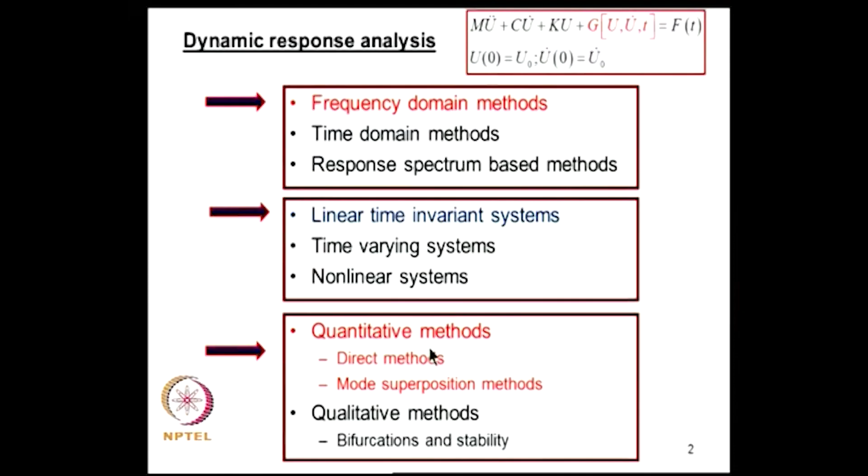Now, in our discussion on damping models, we saw that there are two alternative strategies to model damping. One is within the framework of linear system modeling: one is viscous damping, the other is structural damping. The classification into viscous and structural depends upon the behavior of energy dissipated per cycle as a function of frequency.

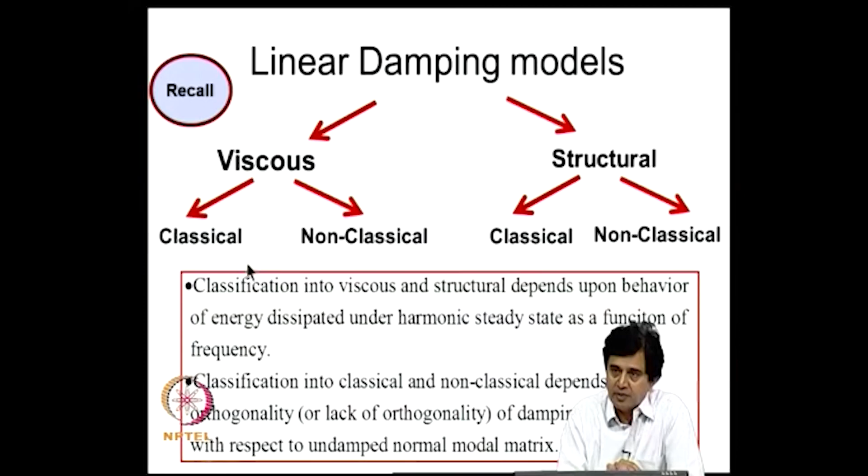We also classify the damping models as being classical or non-classical, and that classification is related to the issue of whether undamped normal modes are orthogonal to the damping matrix or not. So if the damping matrix is orthogonal to the undamped normal modes, then we say that the damping model is classical, otherwise it is non-classical. So we also saw that the input-output relation for linear time invariant systems,

in time domain is through a convolution integral, in frequency domain it is through a frequency response function, and the impulse response h of t is the response of the system to a unit impulse, and h of omega is the amplitude of the response to an external harmonic excitation.

So we were discussing the questions about damped forced response analysis. We considered an equation of this form with given initial conditions, and we started with the undamped normal modes, where phi is the modal matrix, and we made the transformation phi into z of t. Z of t is a new coordinate system.

Upon substituting that into the governing equation, I get this equation, and pre-multiplying this equation by phi transpose, I get this equation. Here phi transpose m phi is the new mass matrix in the new coordinate system z of t, and that is an identity matrix. That is how we have normalized the normal modes, and phi transpose c phi remains as it is. This is what we need to discuss now, and phi transpose k phi is a diagonal matrix with the eigenvalues on the diagonal. F bar of t is the generalized force, which is phi transpose f of t.

Now the question is, what happens to this phi transpose c phi? If phi transpose c phi is a non-diagonal matrix, then the equation of motion would still remain coupled, and all our exercise in finding phi and making this transformation will not be fruitful.

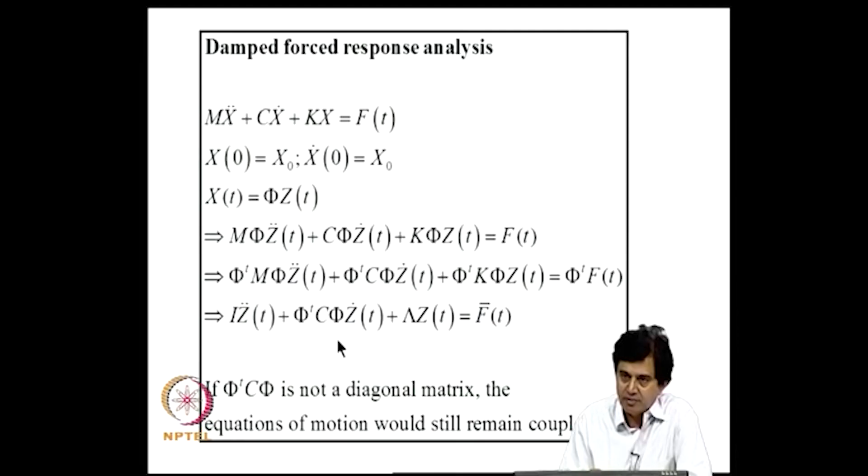So what we do in classical damping models is restrict the class of damping models, that is the damping matrix C, to only those matrices where phi transpose c phi is a diagonal matrix. Such damping matrices are called classical damping matrices, and in such cases the undamped normal modes, that is phi transpose c phi, will be a diagonal matrix. That means the undamped normal mode diagonalizes the C matrix also.

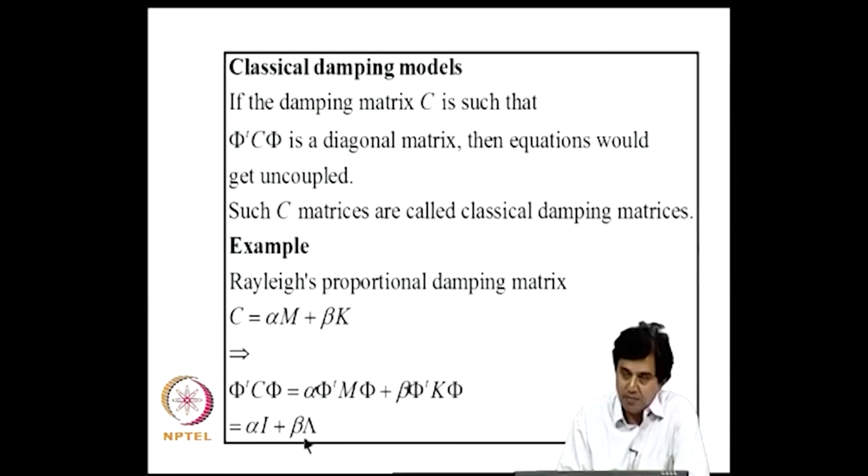So an example for this we saw is the so-called Rayleigh's proportional damping matrix, alpha m plus beta k. If I now find phi transpose c phi, I will get alpha into phi transpose m phi, plus beta into phi transpose k phi, and this is alpha I plus beta into capital lambda. Now, using this,

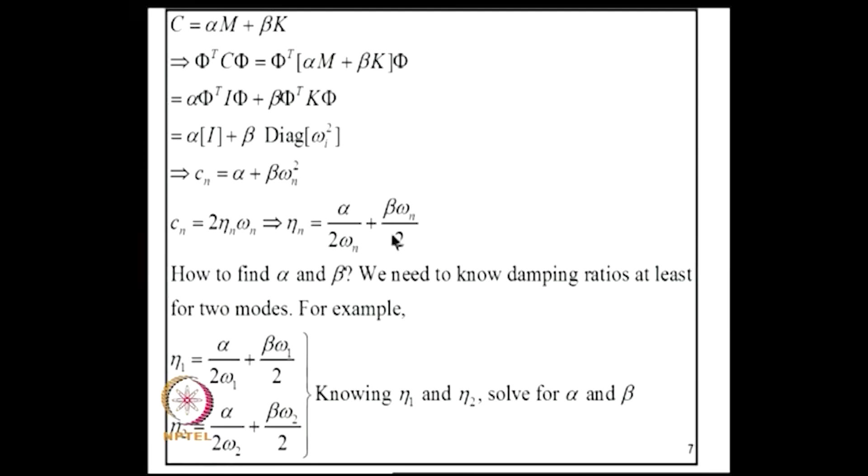we showed that the damping ratio as a function of frequency has typically this type of behavior. It has two open parameters, and we determine the two open parameters. We write the equations for, say for example, mode 1 and mode 2 where we know the damping, and we solve for alpha and beta. The moment I find alpha and beta, damping for all other modes is evaluated from this equation.

Now let us examine in some detail the model C equal to alpha m plus beta k. The success of this model in making phi transpose C phi diagonal depends on two orthogonality relations: phi transpose m phi is diagonal, and phi transpose k phi is diagonal. There are two model parameters here, alpha and beta. The fact that it has two model parameters is very much related to the fact that there are two orthogonality relations that we are using. That is, the model alpha m plus beta k admitting two parameters is related to the fact that we have two orthogonality relations.

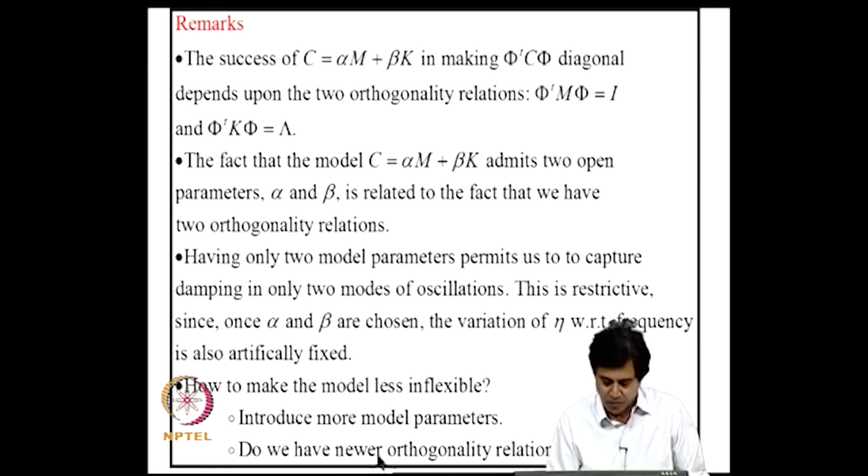So questions we could ask at this stage: how do we make the model less inflexible, or more flexible? The idea is to introduce more model parameters. If I introduce more parameters, instead of alpha beta I have say alpha 1, alpha 2, up to alpha n, and beta 1, beta 2, up to beta n - how do I select them, and how do I ensure that my choice of alpha and beta ensures that phi transpose C phi is still diagonal? This leads us to the question: do we have newer orthogonality relations, or are the two we're talking about the only two? Now it transpires that there are actually two infinite families of orthogonality relations.

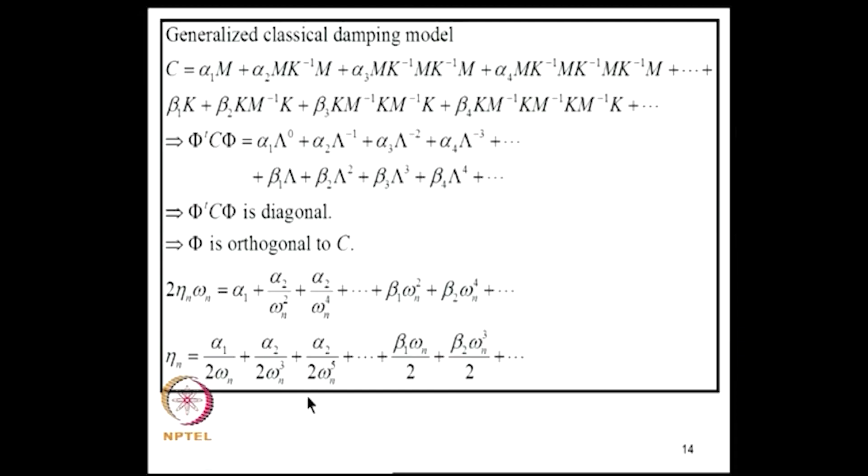This would mean now that I can develop a generalized classical damping model beyond alpha m plus beta k, by using the additional orthogonality relation that we have developed. So I can write C as a linear superposition of various combinations of k and m matrices as shown here.

If we use this expansion, we can show that phi transpose C phi remains diagonal and it has this form. Now that means phi is orthogonal to C if C is of this form.

Now I have as many model parameters as I deem desirable. So if I now use the orthogonality relations and write the diagonal entry in the nth row as 2 eta n omega n, I can write the right hand side in this form. So this is the way eta n varies with omega n.

Earlier we had only this term and this term, now we have more newly introduced terms which will lend flexibility to my modeling of damping.

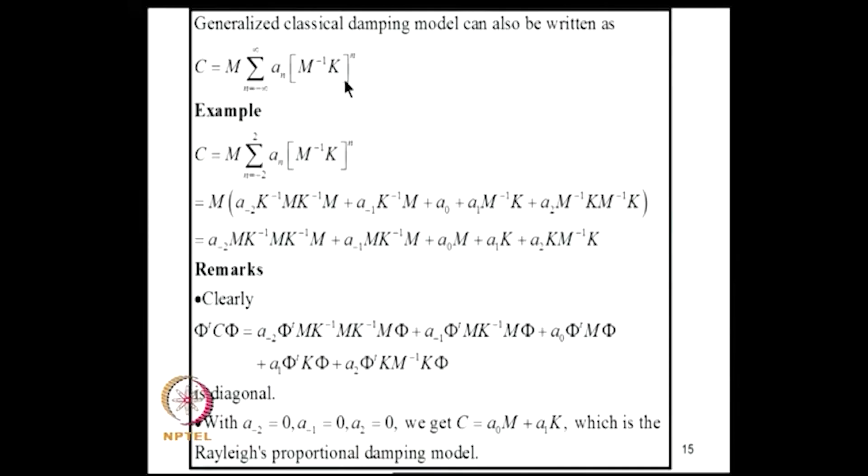So the damping ratio as a function of frequency has now this form. We can make a few observations on this.

We can introduce as many model parameters as the number of modes for which we have damping ratios known. Then damping ratios for modes can be arbitrarily fixed. For example, the damping ratio can be the same for all participating modes. Typically we take, say, damping is 5% for all modes for analyzing an RCC structure under an earthquake, right.

So that is not inconsistent with the expectation that the C matrix is classical. We can arrive at a valid classical damping model based on that assumption.

Now of course, I can find phi transpose C phi if I write it as a diagonal matrix of 2 eta n omega n. From this I can evaluate C as shown here, but this approach is not going to be very helpful because we seldom actually find the full modal matrix in a practical analysis.

Suppose if we have a 1000 degree of freedom model, we would not really evaluate all 1000 normal modes. We would evaluate perhaps about 50 or 100 normal modes, and the phi matrix will often be rectangular, not a square matrix in calculation. So we cannot use this approach to find C.

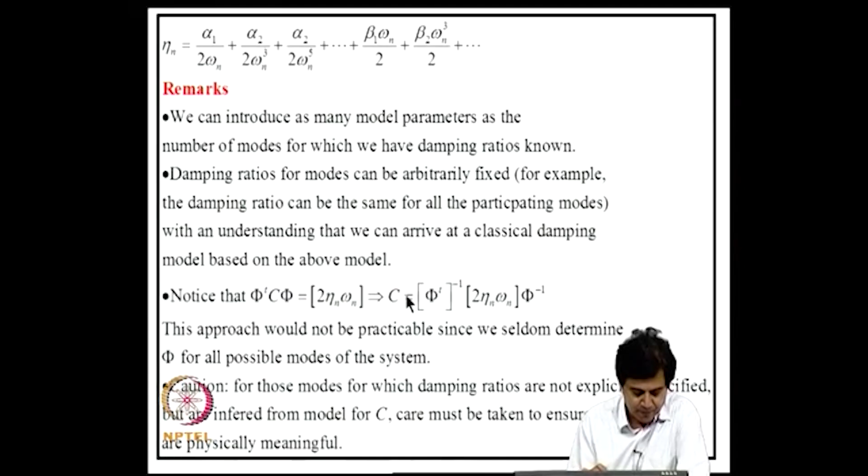Now a word of caution: if you are using models of this kind, for those modes for which damping ratios are not explicitly specified and you bank on this relation to deduce them, you should be careful that the value you get for eta is physically admissible.

They should not become negative, and if they become more than 1 you should be sure that you want to accept that. Eta more than 1 means the system is over damped, and we should really consider whether that is admissible in a given problem.

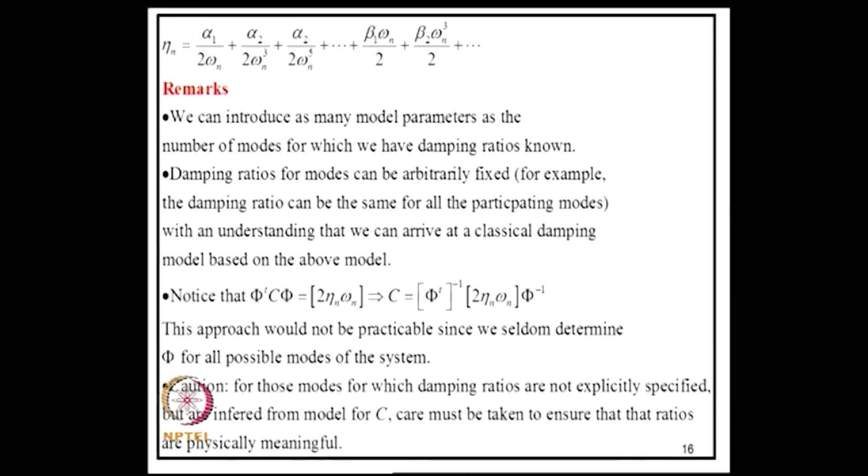Now we will move to the next topic in our discussion, that is calculation of frequency response functions for multi-degree freedom systems. Before we get into the details, we will introduce a few nomenclature found in describing frequency response function of linear time invariant systems. We will start with single degree freedom systems and then move to multi-degree freedom systems. There are various terms like receptance, mobility, accelerance, dynamic stiffness, mechanical impedance, apparent mass, etc., which are used. It is useful to have a clear definition for all these terms in one place, so that if you are reading any special papers or books, you would not feel uncomfortable if you come across these terms. So let us start with that.

Let us start with a viscously damped single degree freedom system, which is driven harmonically by f e raised to I omega t. I am discussing only steady state response here. In steady state, x of t, since the system is linear and driven harmonically, the response would also be harmonic at the driving frequency with an amplitude given by f divided by this quantity. Now I define a quantity known as receptance, which is the displacement per unit force, and that ratio is known as receptance, denoted by alpha of omega. We also introduce a term known as dynamic stiffness, which is the reciprocal of the receptance. So dynamic stiffness is k minus m omega square plus I omega c. This nomenclature is fairly clear - if there is no dynamics, that means omega equal to 0, stiffness is k, which is the static stiffness. This dynamic stiffness includes inertial effects, dissipation effects and driving frequency, that is why the word dynamic stiffness. Now having derived the displacement, I can get the velocity.

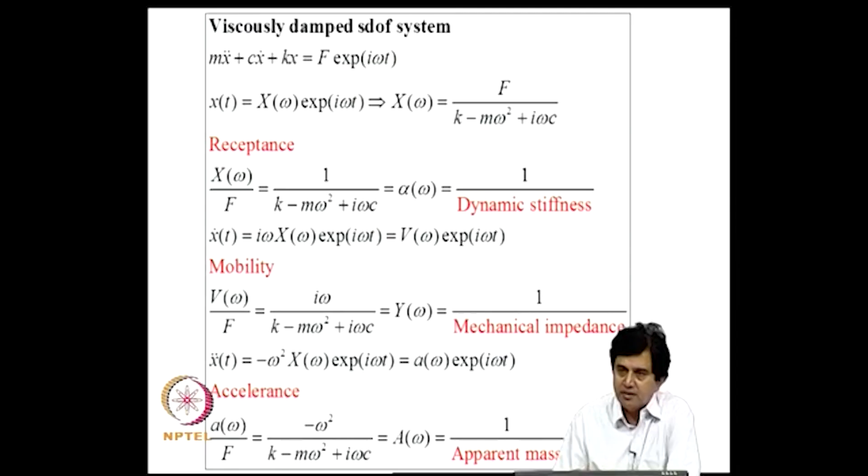Similarly, I can now derive the acceleration. I get this expression, and A of omega denotes minus omega square x of omega, and the acceleration per unit force I call accelerance, and the reciprocal of that is known as apparent mass. So these are the terminologies that are often used.

Similarly, for structurally damped systems, the damping term will be C by omega x dot plus kx. So either we can use a complex stiffness or write the expression in this form. We can quickly deduce the expression for receptance given here, mobility given here, and accelerance given here, and that automatically defines dynamic stiffness, mechanical impedance and apparent mass. The derivation of this is straightforward if you have followed the derivation for the viscously damped system.

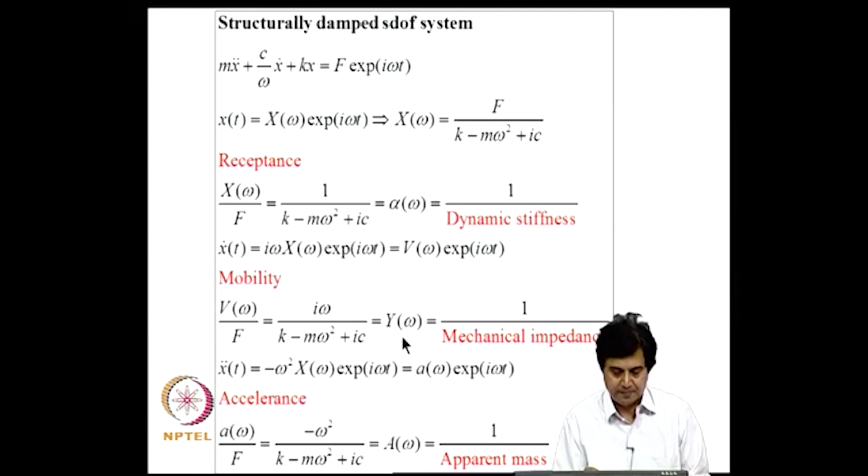Now, in the existing literature, the word receptance is also sometimes described by admittance, dynamic compliance, or dynamic flexibility. That means these four terms - receptance, admittance, dynamic compliance and dynamic flexibility - are all synonymous. I have tabulated here all the terminologies: this is response per unit force, this is force per unit response. So these are the terminologies - this is displacement, velocity and acceleration.

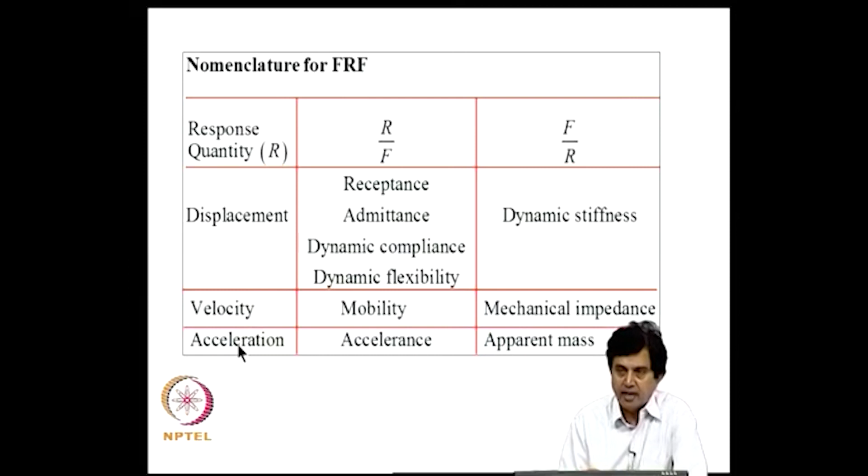Now there are different practices that we follow in displaying frequency response functions. If you plot now, frequency response function collectively denotes either receptance, mobility or accelerance. So the modulus of frequency response function versus frequency, and the phase of frequency response function versus frequency is known as Bode's plot. Bode's plot is actually a pair of plots where we display amplitude and phase spectrum. The word spectrum is used to denote any plot where on the x axis we have frequency.

Now we can also plot the real part and imaginary part versus frequency - there is no specific name for this. On the other hand, we can plot real part of the frequency response function versus imaginary part of the frequency response function. This is known as a Nyquist plot. This is a single plot where frequency does not appear explicitly.

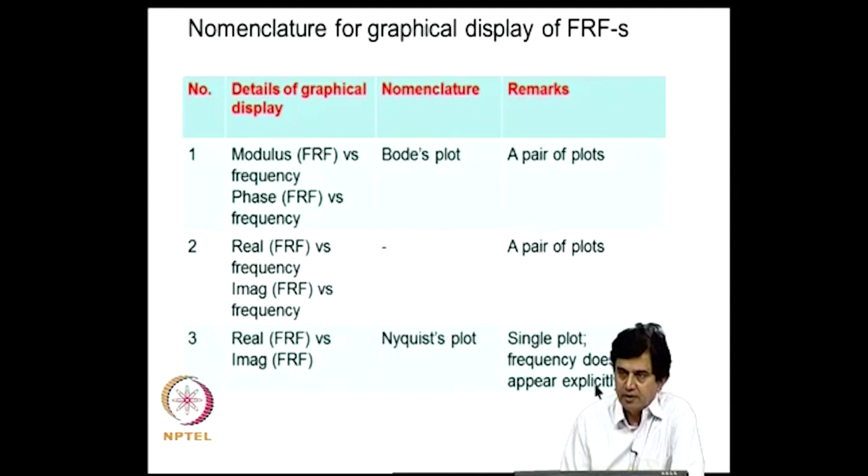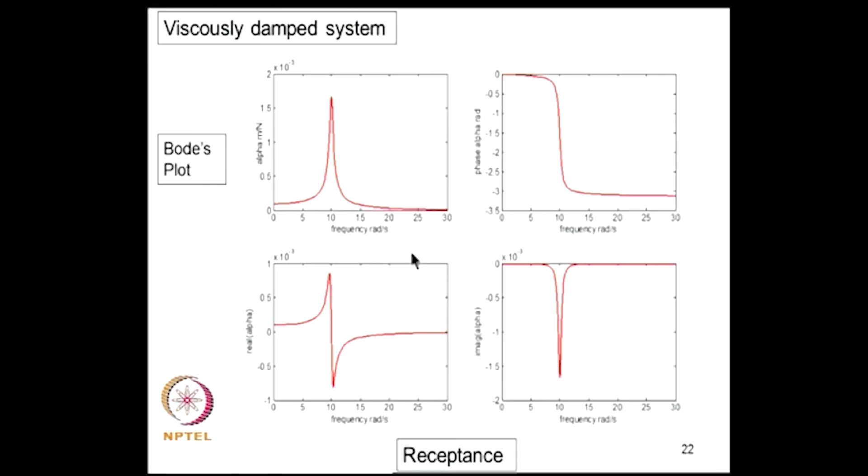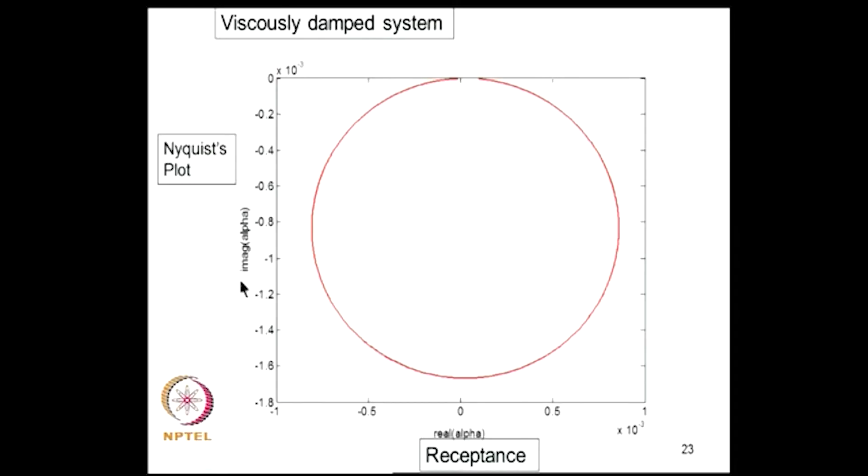So we can see how these graphs look like for simple systems. For example, for a viscously damped system, the Bode's plot, that is amplitude and phase of receptance, look like this, and this is the real part and imaginary part. We will soon discuss what is the nature of these variations. The phase is changing here, the amplitude is growing here, so on and so forth. We need to discuss why they are happening, where they happen, and what this amplitude means, etc. The Nyquist plot, where I plot the real part of receptance versus the imaginary part, looks like a circle as shown here.

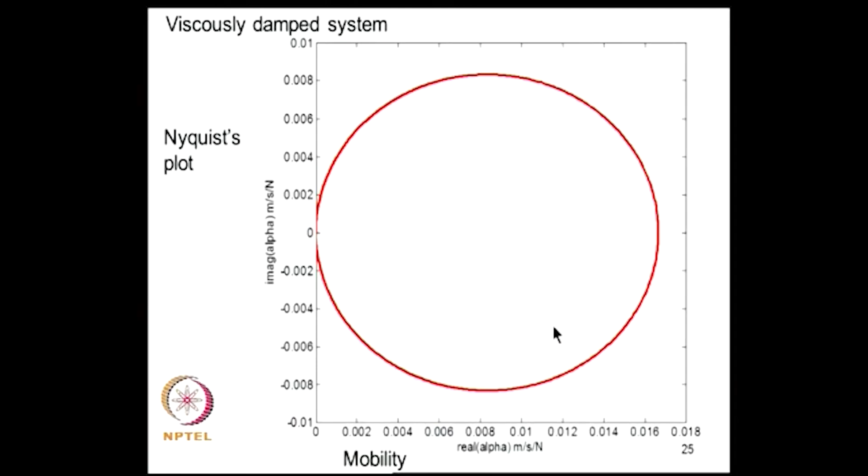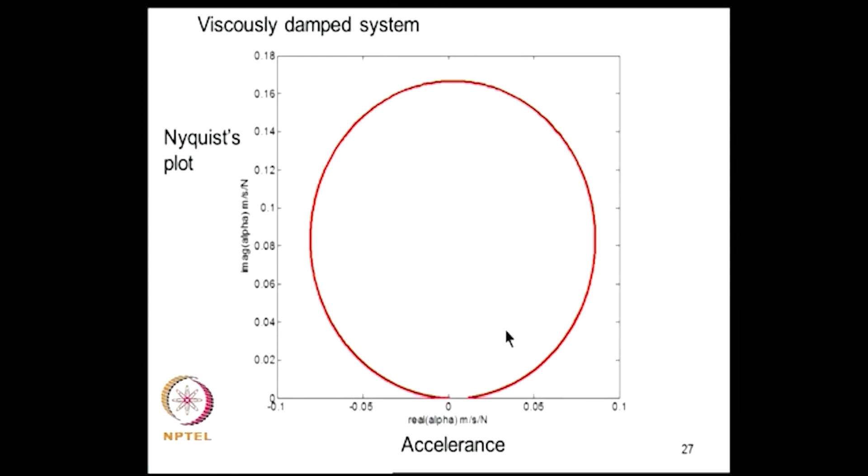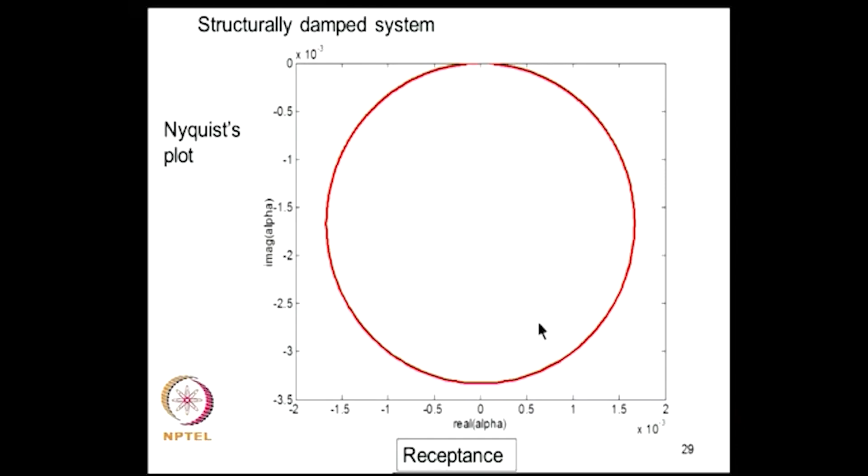Similarly, if you plot now mobility, we get these graphs - Nyquist plot for mobility, Bode's plot for accelerance, this is real and imaginary part of accelerance versus frequency, this is Nyquist plot for accelerance. This is for a viscously damped system. We can look at structurally damped system, we have again Bode's plot for receptance, the real and imaginary parts of receptance, this is Nyquist plot for receptance, this is Bode's plot for mobility, real and imaginary part of the mobility, and so on. This is a Nyquist plot.

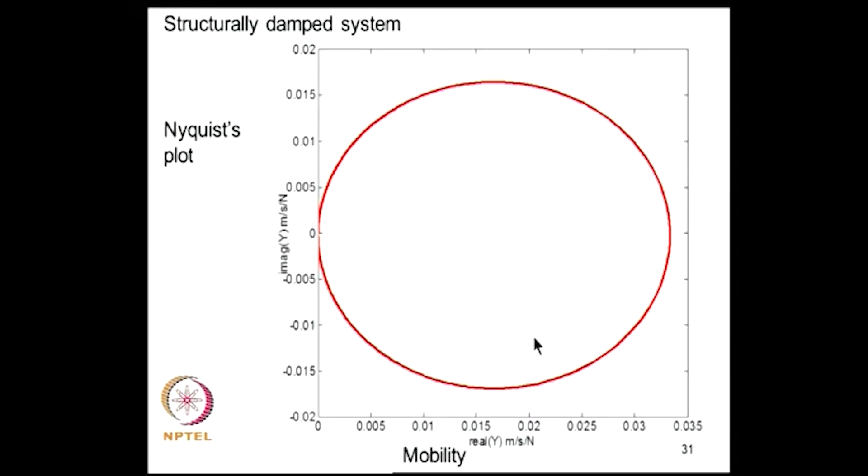So we can see that they have some characteristic features which we need to understand. To understand this, what we can do is consider the limiting behavior of these functions as omega goes to 0 and omega goes to infinity. For example, let us focus on viscously damped system, suppose this is the expression for the receptance.

As omega becomes very large, you can see that in the denominator the first term would dominate and I get this as 1 by minus m omega square. As omega goes to 0, the first two terms will vanish and k will dominate, this will become 1 by k. Similarly mobility as omega tends to infinity will be i by minus m omega, and this is mobility, this will be i omega by k, and similarly accelerance has this limiting behavior.

Now we can consider: if we look at receptance for a mass element, that means I will consider a mass spring dashpot system and put k and c to be 0. So the receptance will be minus 1 by m omega square, and if you take now only stiffness, it is 1 by k. So if you now take logarithm of the amplitude, I get these values.

Similarly, I can derive these similar quantities for mobility and accelerance. So now if I plot the frequency response functions in the log plot, that means y axis is also logarithm and x axis is also logarithm, you will see that these lines are all straight lines. So how do they look?

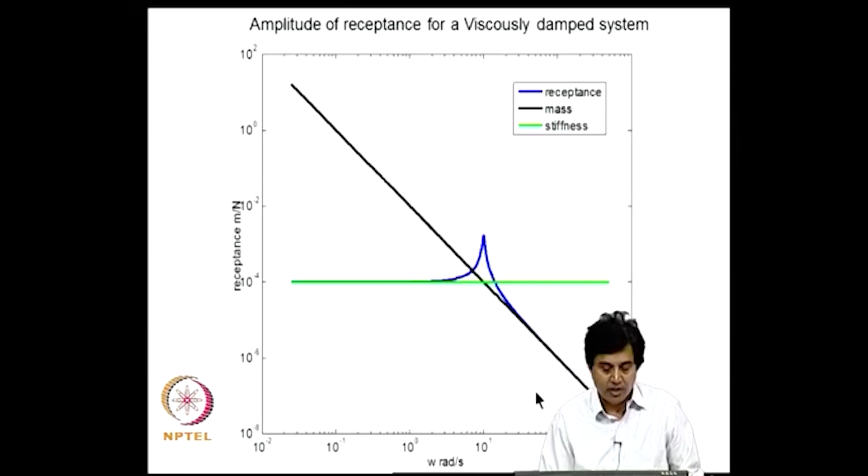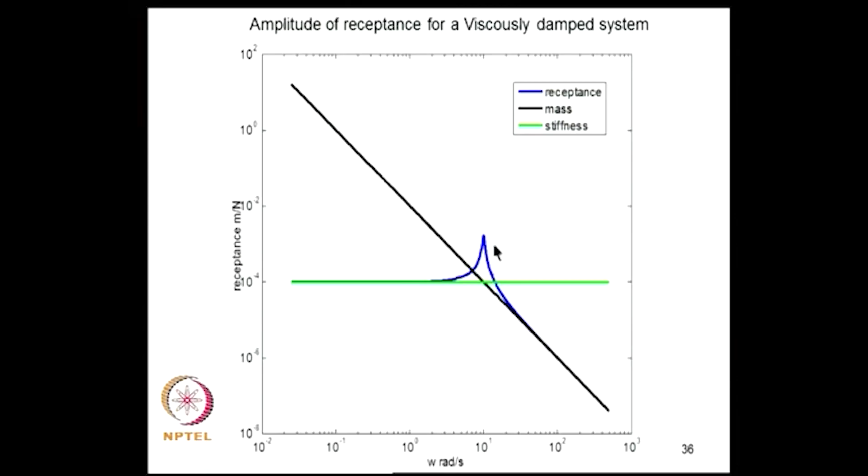For example, for receptance of a viscously damped system, the blue line is the actual receptance function. Please note that x axis is now on log scale, y is also on log scale. So these asymptotes - the stiffness, you can see at low frequency the FRF goes to the behavior of a stiffness, so it is a stiffness dominated behavior. As omega becomes large, the FRF becomes asymptotic to the mass element, so high frequency behavior is dominated by inertial forces. Here, of course, all three quantities - mass, damping and spring constant - control the behavior.

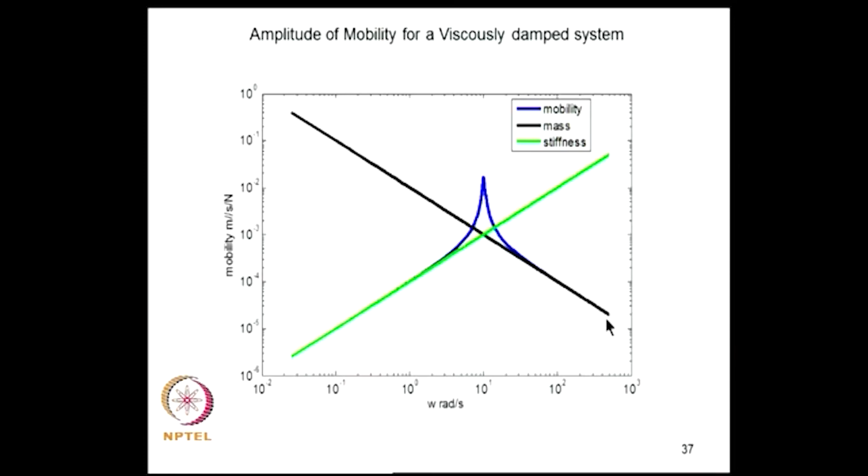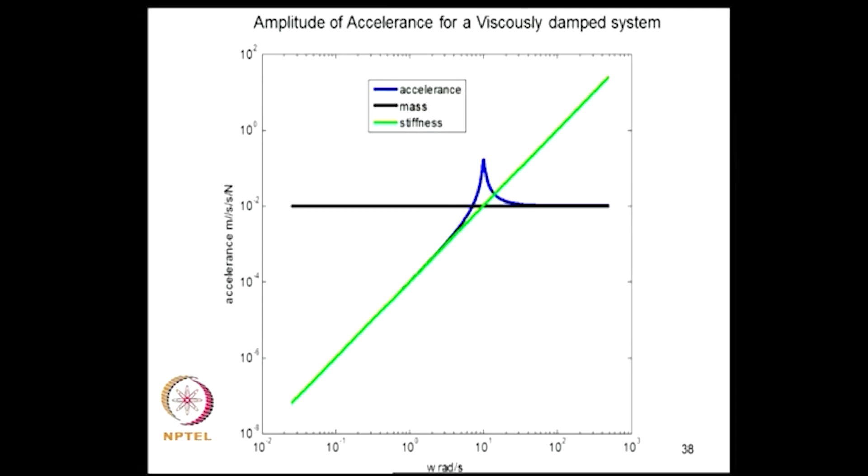So this is for mobility, the green line is the asymptote for stiffness, the black line is the asymptote for mass, and the blue line is the actual mobility curve. As you can see, for small omega the FRF is asymptotic to stiffness, and for large frequency it is asymptotic to mass. This is a similar plot for accelerance, and we again make the same observation. So this gives a clue on how the FRFs behave for small frequencies and very large frequencies. This has important bearing on mode superposition method, especially on questions on truncation of modes. We will see what the implications are shortly.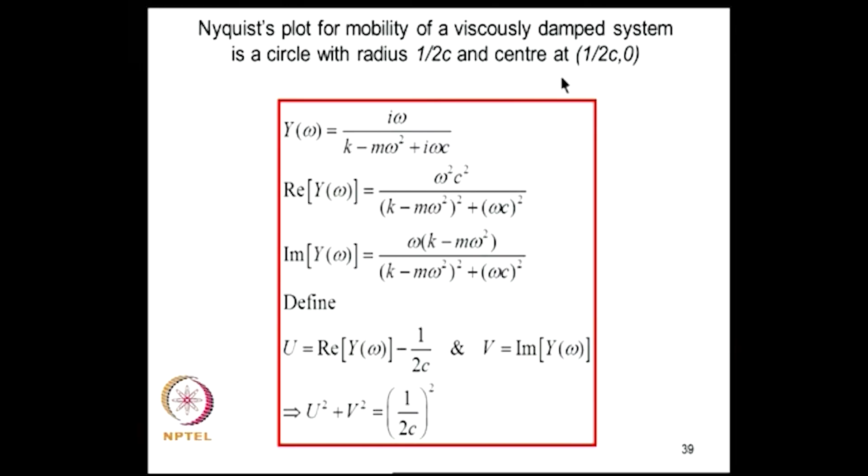Now one more feature that we observed is that these FRFs tend to appear like circles. Indeed you can show that for a viscously damped system, if you consider the mobility and look at its Nyquist plot - suppose if I introduce u as real part of mobility and shift it by 1 by 2c, and v as this, you can show that u square plus v square is a circle. That means the Nyquist plot for mobility for a viscously damped system is a circle with radius 1 by 2c and its center located here. This helps - this is one way of measuring damping. If you are doing an experiment, you plot the mobility as a Nyquist plot and measure its location and radius, you will get an idea about the damping.

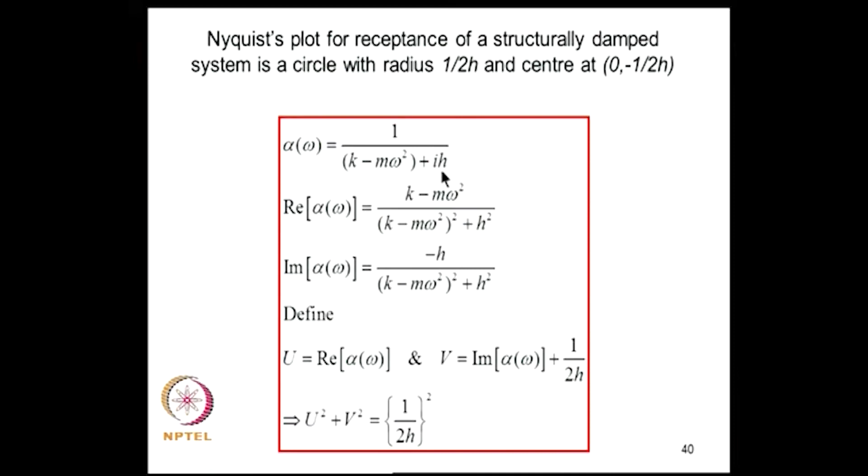Similarly, for a structurally damped system, you can show that receptance will be a circle with this as the radius, where H is the complex part of the stiffness, the imaginary part of the stiffness associated with energy dissipation.

Now I talked about single degree of freedom systems. Now if you come to multi degree of freedom systems, there is yet another basket of terminologies which we should feel comfortable using. Suppose if I consider a cantilever beam and there are two stations, say R and S - R is a drive point, S is a measurement point, say. Now I drive at R the system with a harmonic excitation e raised to i omega t. XRR of t is the drive point response, XRS of t is the transfer response at some other station. So I can as well drive at S and measure at R. So I have XRR, XRS, XSR, XSS.

Now, we will assume that the system has reached steady state and is a linear time invariant system. As time becomes large, the response is harmonic at the driving frequency, and capital XRR and XRS are the amplitudes of response.

Now, I will assemble these amplitudes into a matrix and call it the receptance matrix: XRR of omega, XRS omega, XSR omega, XSS omega. You can see that this is a symmetric matrix, it is complex valued, and it is symmetric but not Hermitian.

Now, we call XRR of omega as point receptance, point mobility, or point accelerance, depending on whether you are talking about displacement, velocity, or acceleration. XRS of omega we call transfer receptance, transfer mobility, or transfer accelerance. So the words point and transfer refer to drive point and measurement points.

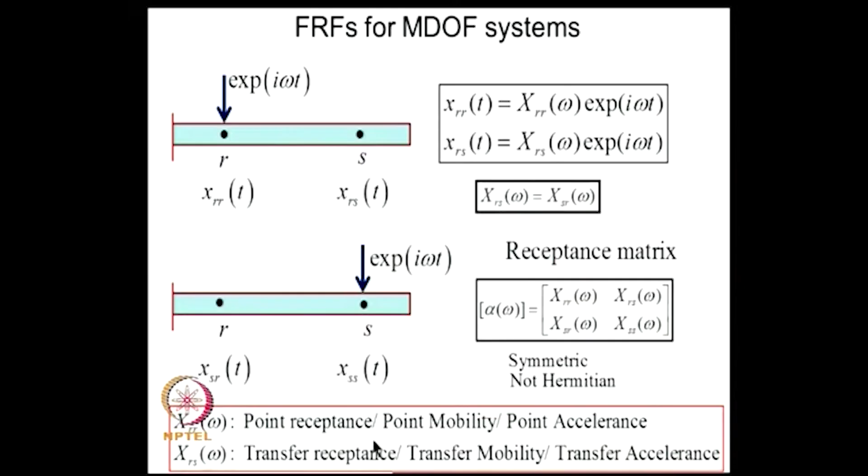It may so happen that I apply a force e raised to I omega t and measure translations and rotations, say at station 1 and 2. At each station there are 2 degrees of freedom, say 1, 2, 3, 4. So delta 1 of t can be written as delta 1 1 of omega e raised to I omega t, and so on.

So this delta 1 1 of omega, we call it direct point receptance. We use the words direct and cross to indicate that if I apply a force and measure a rotation, that is cross. If you apply a force and measure translation, it is direct. So if the drive point and measurement point coincide, it is point; if not, it is transfer.

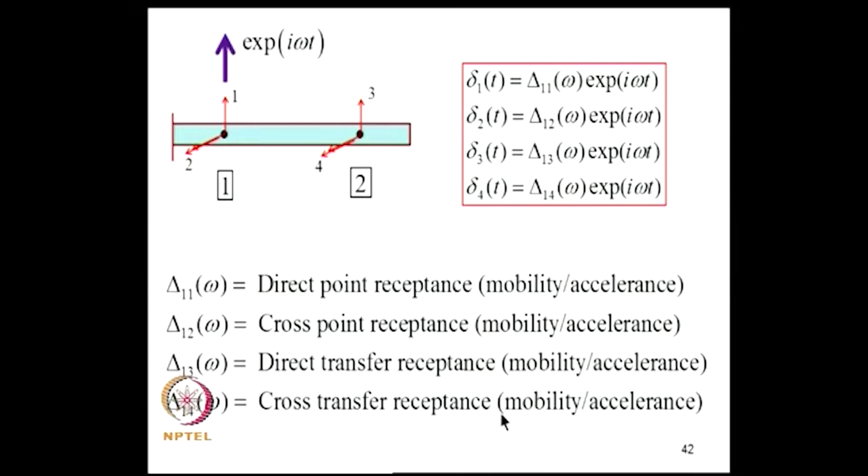So we have various combinations of these terminologies. If you are reading research papers, as I said already, you may come across these terms, so it is useful to know what they mean.

So the displacement vector is written as the receptance matrix into the force, the velocity vector is mobility into force, and acceleration is accelerance into force. So what was scalar quantities for single degree of freedom systems becomes now matrices.

So the inverse of receptance is the dynamic stiffness matrix, the inverse of mobility is the mechanical impedance matrix, and the inverse of accelerance is the apparent mass matrix. If you are doing experimental work, we often measure acceleration and therefore we will be measuring accelerance.

Now, obviously, receptance, mobility, and accelerance are easier to measure than dynamic stiffness, mechanical impedance, and apparent mass. I leave it as an exercise for you to think about why.

One word of caution: although alpha inverse implies the dynamic stiffness, it does not mean that individual terms in the dynamic stiffness matrix are reciprocals of individual terms in the receptance matrix. This is a common error that people seem to make, so you should be very cautious about this.

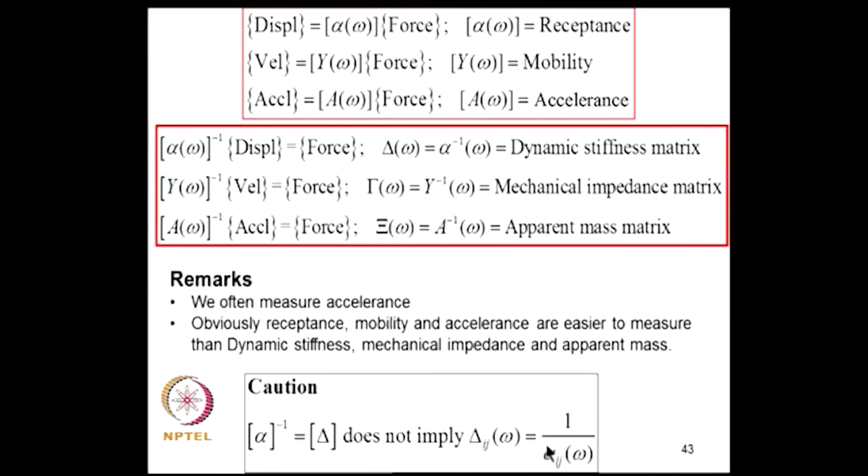Now, equipped with these terminologies, we will return to the problem of deriving the frequency response function of a viscously damped multi degree of freedom system. We will assume that damping is classical to start with, and later on consider what happens if the system is non-classically damped.

So the equation of motion is m x double dot plus c x dot plus k x equal to f e raised to I omega t. This f is a vector such that only the sth entry is 1, meaning I am driving the system by a concentrated harmonic load at the sth degree of freedom. It could be either a bending moment or a shear force, depending on the model you are using.

X rs of t is the response of the rth coordinate due to unit harmonic driving at the sth coordinate. So we are interested in knowing what happens to this as t tends to infinity; that is the question.

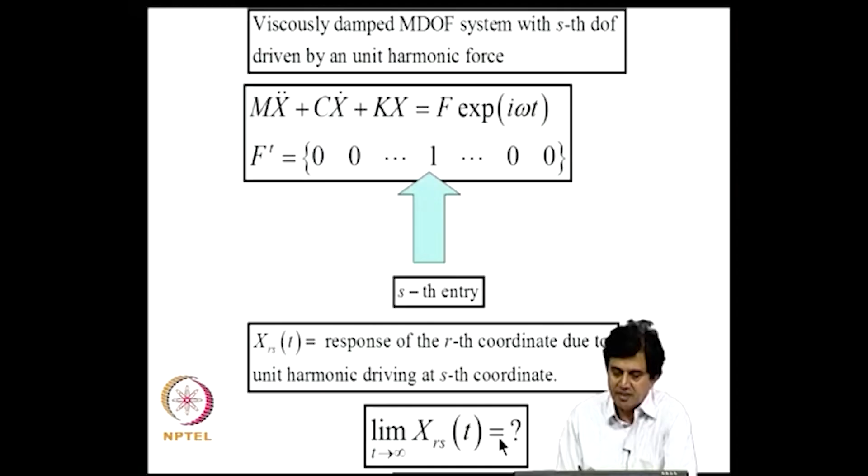Now, the system is linear, time invariant, and being driven harmonically. Therefore, in steady state, all response quantities are harmonic at the driving frequency with varying amplitudes. So I can assume the solution to be of the form x naught e raised to I omega t. Now I will differentiate this to get velocity and acceleration and put it back into the governing equation. I get the equilibrium equation in the frequency domain, since e raised to I omega t cannot be 0 for all t. So this matrix is the dynamic stiffness matrix, and its inverse is the receptance matrix.

Now we have to evaluate this matrix.

Now we will make the transformation x equal to phi z, and z we take as z naught e raised to I omega t. So if I make this substitution into the equation and use the fact that C is a classically damped matrix, these orthogonality relations hold: phi transpose m phi is I, phi transpose k phi is a diagonal matrix, and phi transpose C phi is another diagonal matrix.

If I now substitute here for x naught, I will write phi z naught which is f, and pre-multiply by phi transpose, I will get this. Now, I will get subsequently minus omega square phi transpose m phi plus I omega phi transpose C phi plus phi transpose k phi into z naught is equal to this.

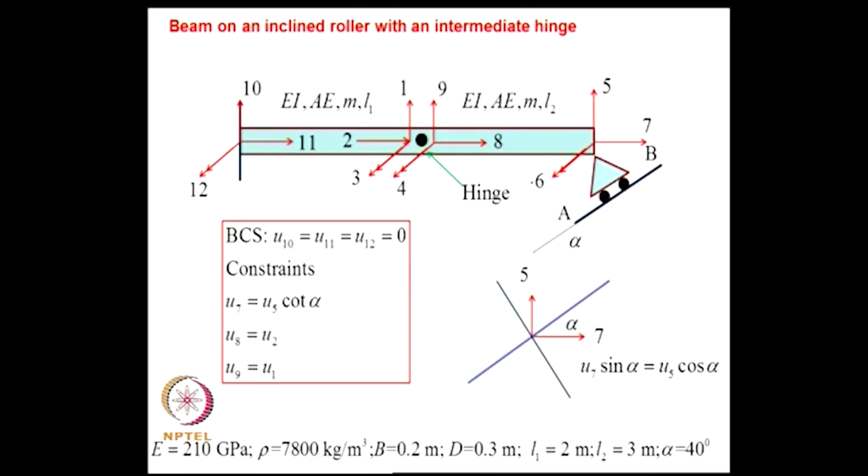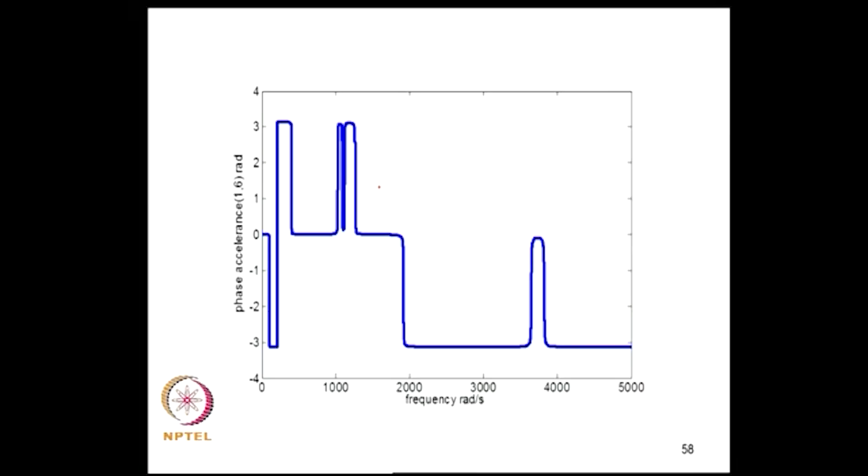So this is the phase angle for the system, again it is undergoing rapid changes at resonance. Now this is a Nyquist plot for these graphs, and you see that each loop corresponds to one of the modes. For a single degree freedom system, it is one closed loop.

So there are now say 6 loops, if you carefully see you will be able to see that, and this is for the 1,6 Nyquist plot. The loops flip on the other side and it appears like this.

Now all FRFs for receptance have been superposed in this graph. Now what you need to appreciate here is, this is the first natural frequency, the second, the third, 4, 5, 6. So all the FRFs are peaking at the natural frequencies, but you look at the dips, what happens between the two peaks, there is a great deal of variability.

There are no characteristic frequencies at which all FRFs are reaching a minima or a dip like this. So at this stage we can just notice it, and we will shortly offer an explanation.

Now, the incidence of resonant peaks, anti-resonances and minima. The word anti-resonance I need to explain. So let us consider the FRF and assume that damping is fairly low, so we need not worry about it when we discuss this. We will ignore those terms.

Now, let us consider the case of a point receptance. This is the mode superposition expression for the FRF. The first thing we can observe is the numerator is always a square of a number, so it cannot be negative, it is non-negative.

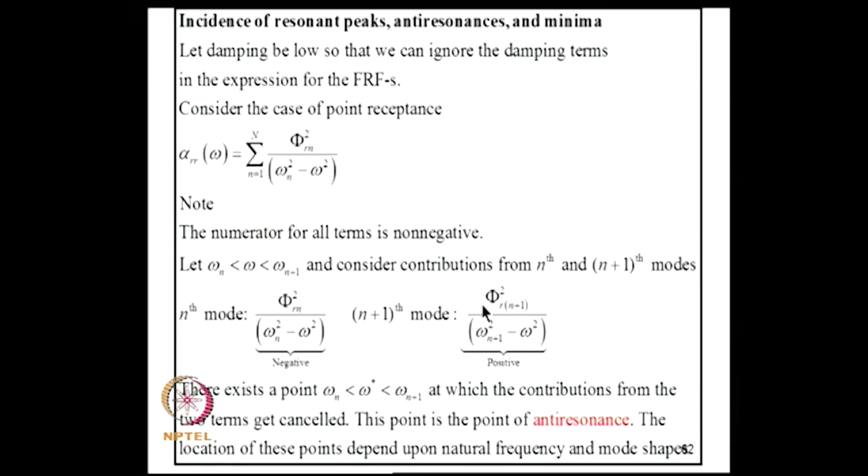The first denominator: since omega is greater than omega n, this term will be negative. On the other hand, omega is less than omega n plus 1, so this will be positive. That means this contribution will be negative, this contribution will be positive. So for a certain omega between omega n and omega n plus 1, these positive and negative contributions cancel and you get almost a zero response, and that point is known as anti-resonance. So you see this is an anti-resonance, this is an anti-resonance, this is an anti-resonance.

Now let us consider cross receptance, meaning the drive point and measurement points are different. This is the expression for the FRF using mode superposition. Again, let us consider omega lying between omega n and omega n plus 1. The contribution from the nth mode is this, from the n plus 1th mode is this. Now look at the numerator: there is no guarantee that it is non-negative, it can be negative or positive.

The denominator: this will be negative, this will be positive. So we can consider different combinations now, numerator 1 and numerator 2. Denominator, this is negative, this is positive, that is known. Suppose numerator 1 is negative and numerator 2 is also negative: the first term will be negative by negative, which is positive, and this will be negative by positive, which is negative.

So between these two contributing terms, or between these two frequencies, there will be an anti-resonance, and that depends on the sign of the mode shapes. On the other hand, if the mode shapes are such that this numerator is negative but this numerator is positive, then the first term is negative by negative, positive, and this is positive by positive, positive. So it contributes to a minimum, there will not be an anti-resonance now.

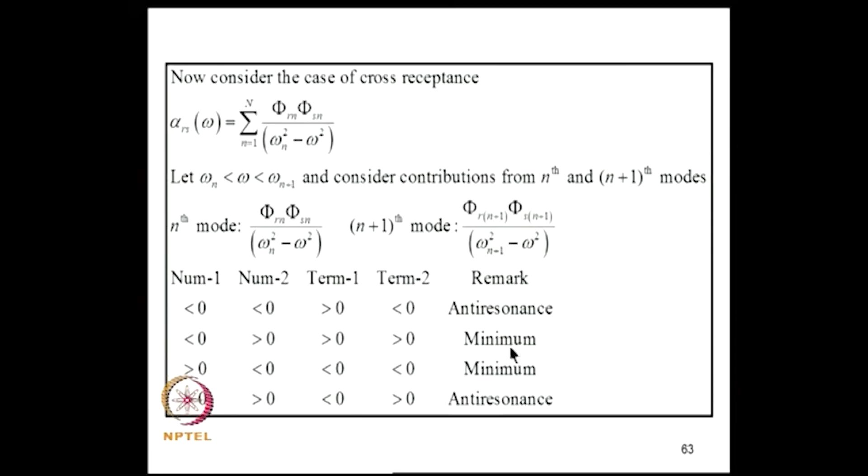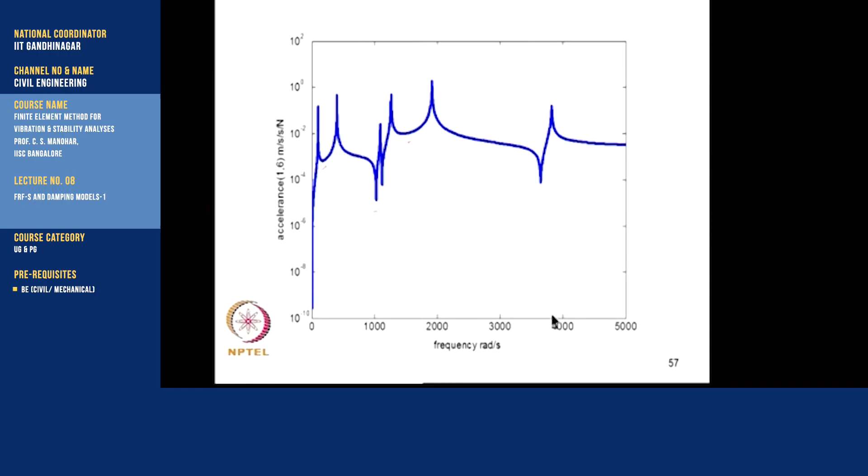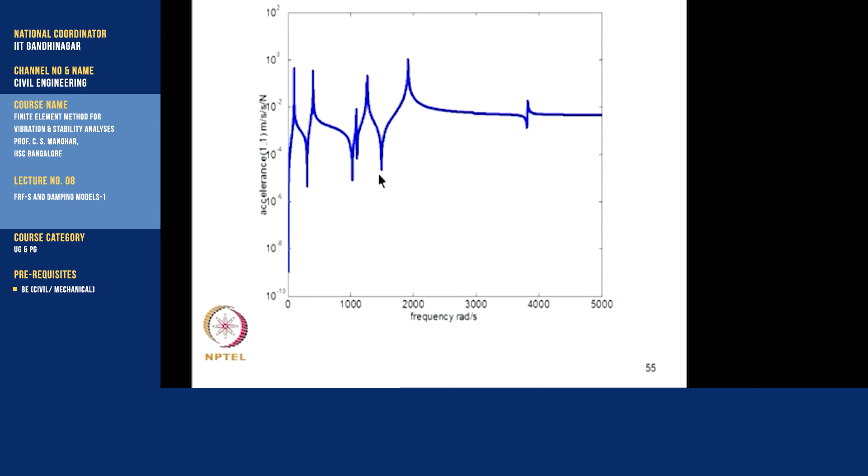Similarly we have other situations where we get a minimum or anti-resonance. So if you go back to this graph, this is a drive point. Between two resonant peaks there is invariably an anti-resonance. So anti-resonance and resonant points alternate.

But if you come to, say, accelerance 1,6, meaning the drive point and measurement points are different, there are different possibilities. For example, between peak 1 and peak 2 there is no anti-resonance point, but only a minima. Two small positive numbers add up to produce another small number. Whereas if you look at the behavior between this peak and this peak, one term is positive, another is negative, and they cancel out, producing a very small number. Of course, in this system damping is not zero, so it shows a non-zero value, otherwise it would dip to zero.

So what we can observe: all frequency response functions peak at the same frequencies, which are the natural frequencies. But this is not true for anti-resonance points and minima, because the location of anti-resonance and minima depends on mode shapes also, in addition to the natural frequencies. For a point frequency response function, where the drive point and measurement points are the same, between every two resonances an anti-resonance occurs without exception. Whereas for transfer FRFs, they show a mixture of anti-resonance and minima.

Resonant peaks are accompanied by large responses and rapid changes in phase angle. Anti-resonance points are accompanied by low responses and rapid changes in phase angle. The presence of damping could make identification of resonance, anti-resonance and minima difficult. When damping is absent these are very clearly pronounced, but if damping is large, the so-called modal bandwidth will increase and contribution from neighboring modes will also increase. We will discuss that sometime later. So we may not get clear peaks, anti-resonance and minima points.

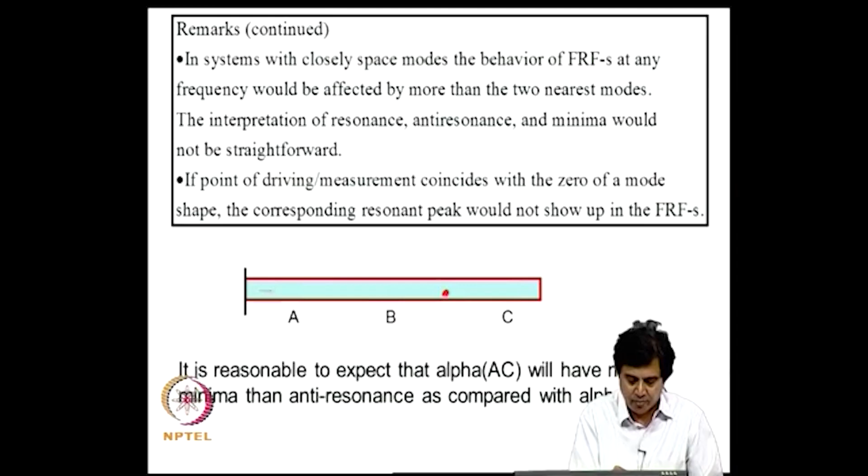Now, if the point of driving or measurement coincides with the zero of a mode shape, we call that zero a node, and if you are driving at a point where a node is occurring, then the corresponding resonant peak would not show up in the FRF. For example, in a cantilever beam there can be a zero somewhere for the second mode, where the mode shape could look like this. Suppose you drive there - at that frequency there will not be any peak in the FRF. That also you should bear in mind.

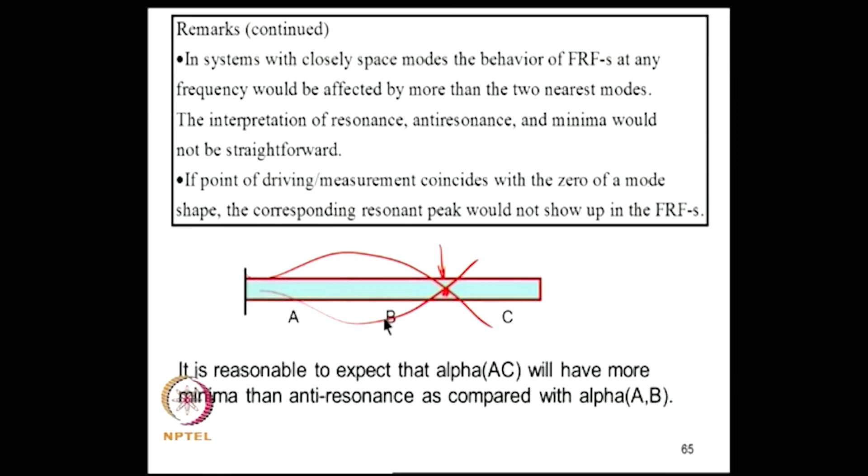Now, I said that at the drive point resonant peaks and anti-resonant points alternate. So if your measurement point is close to the drive point A, but not exactly A, we would expect more anti-resonances than minima, because all the modes are likely to be in phase, unless between A and this point there is a change in sign of the mode shape. But if you move to far away stations, the propensity for occurrence of anti-resonance comes down. So it is reasonable to expect that the receptance alpha AC will have more minima than anti-resonances compared with alpha AB. This is another feature you can see if you carefully analyze frequency response functions.

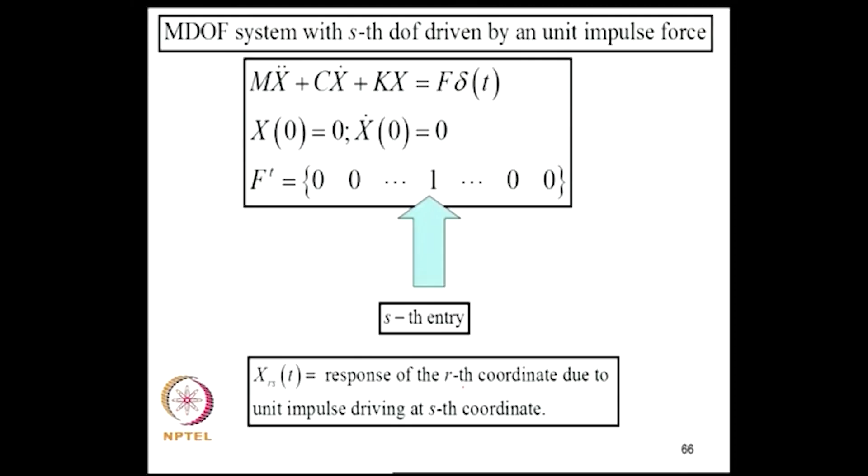Now, we have analyzed the response of a classically damped, viscously damped system with a classical damping matrix under harmonic load. So we can now switch over to the time domain and carry out a similar analysis.

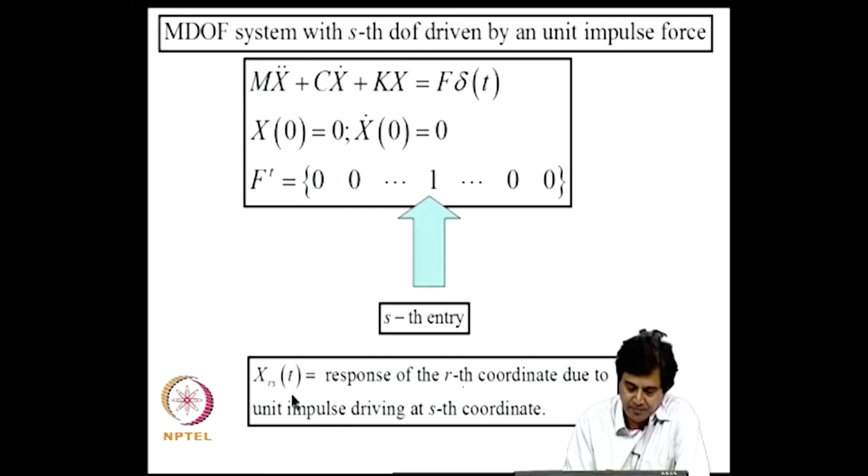This is straightforward. If I have the equilibrium equation where I am now driving the system impulsively at some s coordinate, f is again 0 except for one coordinate. So how do I get the response at say the r-th location? This again can be formulated.